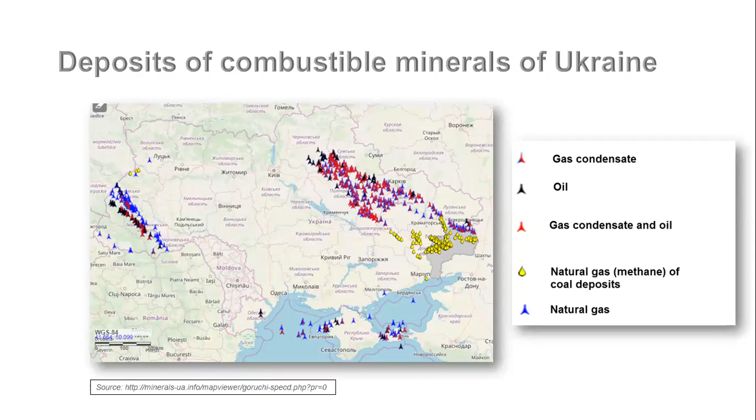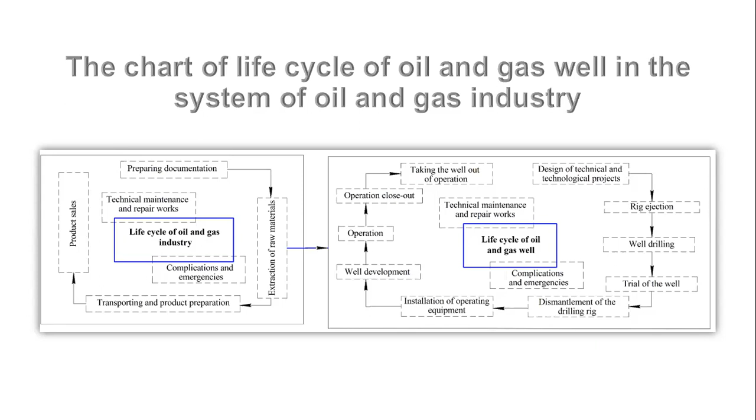We have offered the investigation aimed at the design of eco-efficient technology during the oil and gas production sites life cycle. Based on the analyzed materials, a life cycle scheme of an oil and gas well has been developed, where the well is presented as a separate element of the overall life cycle of the oil and gas industry.

Different stages of the life cycle of the oil and gas industry cause environmental impacts of varying degrees of intensity and harmfulness. At each stage, there are needs for different resources: transport, energy, natural resources, and other materials. They form input streams, while the output produces various emissions, discharges, noise, vibration, etc., which generate output streams. It is possible to allocate regulated emissions which are caused by the provided technology process. However, emergencies that may occur during production operations must be eliminated as soon as possible.

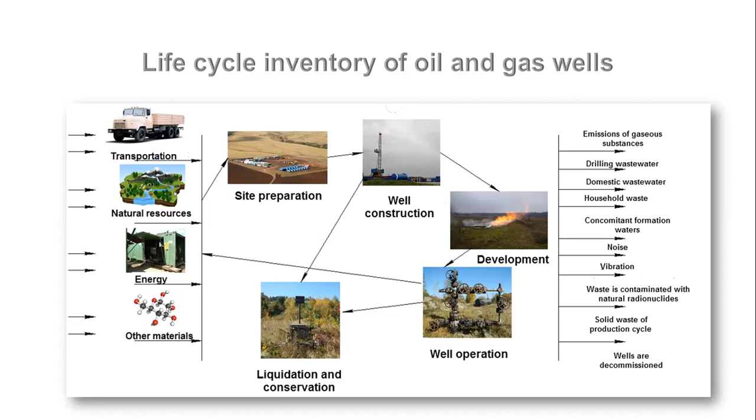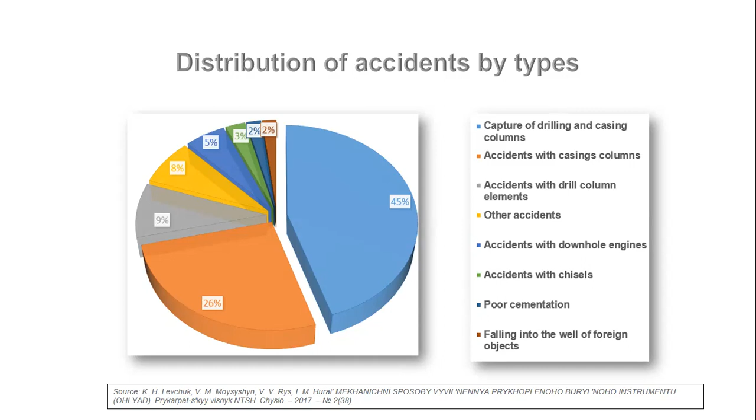Analysis of the distribution of accidents during the laying and operation of wells by type shows that most often there is capture of drill and casing, 35 to 45% of the total number of accidents. Other sources provide data on 85% of all causes of accidents with drill string elements and capture. Thus, when drilling production and exploration wells, the most common and severe accidents are the capture of drill and casing. Accidents of this type are the longest. They take 35 to 45% of the total time spent on the elimination of accidents.

The increase in recent years of accidents with the drill string and its elements is due to the increase in drilling deep, direct, angle, and horizontal wells, that is, more severe operating conditions. Therefore, capture is an unforeseen violation of the process when drilling a well, which is characterized by a loss of mobility of the column and cannot be eliminated by applying acceptable loads.

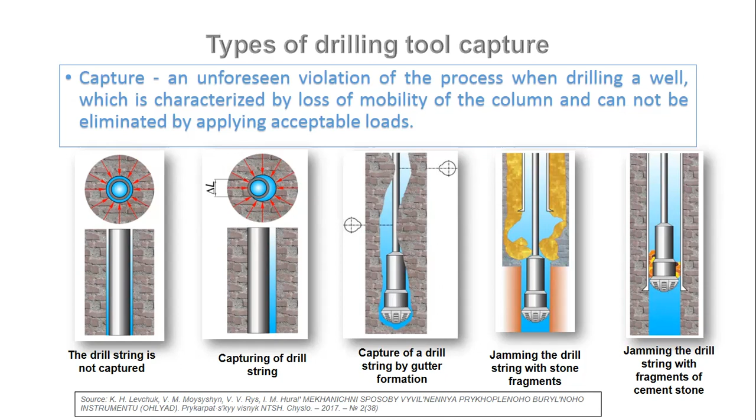There are currently a number of existing problems related to the elimination of drill string capture. A number of these call for unscrewing the pipes from the caught pipe. The most popular way of unscrewing pipes from the caught pipe is the use of pipes with anticlockwise screw. This way is labor-consuming, power-consuming, and causes environmental pollution.

The use of this way causes extra pollution to the environment by transportation means delivering and taking away big amounts of tools with anticlockwise screw, and sustained operation of drilling rig engines when the available pipes with clockwise screw are replaced by ones with anticlockwise screw. And when the operation is completed, the reverse replacement takes place. The total length of pipes with anticlockwise screw is equal to the length of the wellbore and may comprise from 1,000 meters up to 6,000 meters and more, and a significant number of resource costs.

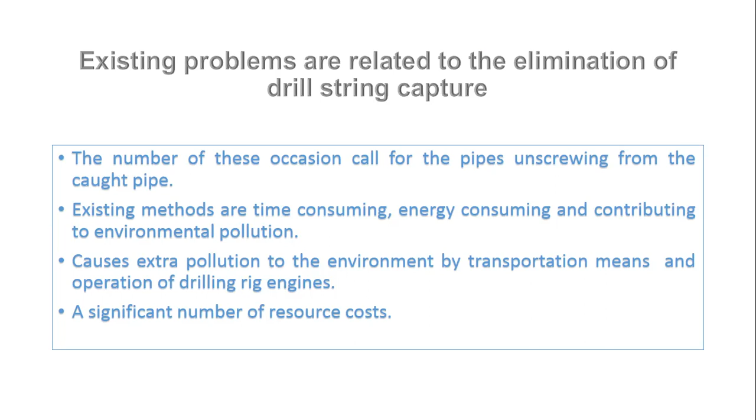Thus, taking into account all the factors mentioned, the aim of these materials is to develop effective tools for unscrewing pipes within a well site with increased operational reliability and enhanced technological possibilities. The main idea of the innovative tool development is to reduce time cost for removing emergency conditions, which makes it possible to increase the environmental safety level of the well site construction process and oil and gas extraction.

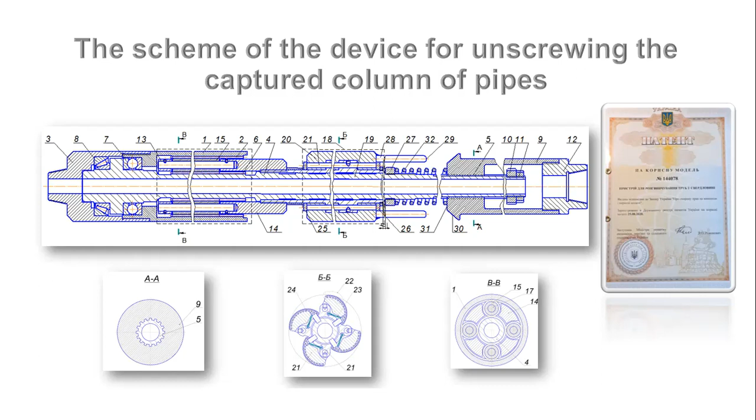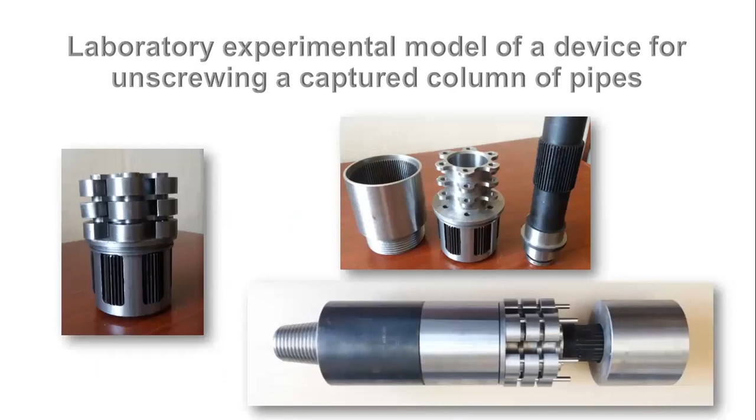Given the shortcomings of existing technologies, attention was directed to improving the device for converting the existing right-hand rotation of the drill string to left-hand rotation of the catching tool. A patent has been obtained for the developed device. Laboratory experimental samples were also made. So we got a number of benefits.

The offered construction of the device, which functions as a transformer of rotation direction, is lowered into the wellbore with the aid of existing pipes with clockwise screw, after which there is no necessity to use pipe with anticlockwise screw, reducing the time of preparation work needed to remove the emergency, and respectively the environmental impact is shortened. The cost of the device is an order lower than with the use of pipe with anticlockwise screw. Based on the above, we can conclude that the developed device is eco-efficient.